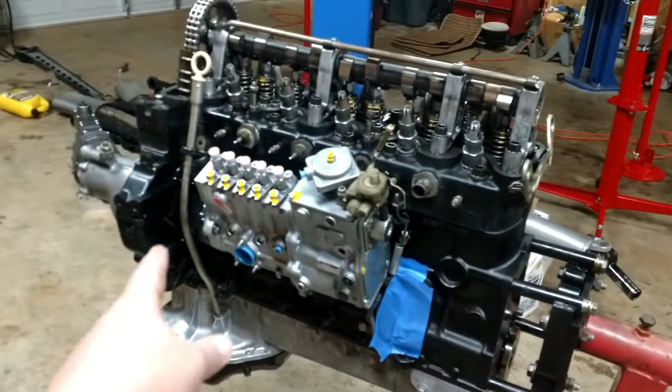Tonight I'm going to start working on putting some lines on the fuel injector and the injection pump, and putting the oil filter housing on. I need to crank the engine up on the test stand, so I'm not going to have my oil cooler - it's not going to be in a car. A guy on the forums told me these are M18 by 1.5 fittings.

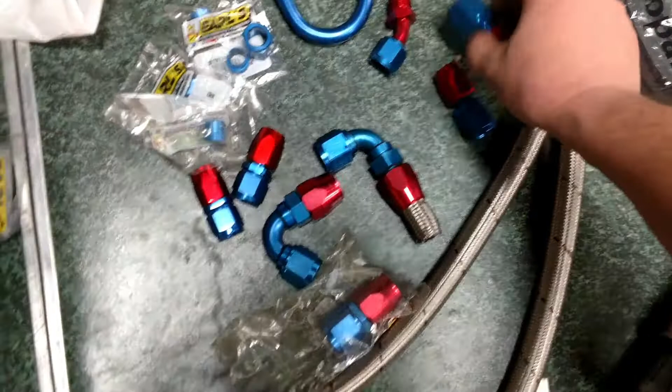So I'm going to get that M18 by 1.5 to a 10 AN fitting. From working on the race car over the years, I've accumulated lots of AN fittings, and I had some leftover 10 AN hose here. So I'm just going to throw a couple of these fittings on the end of the hose like this. That's a 10 AN line - plenty for oil flow to flow through.

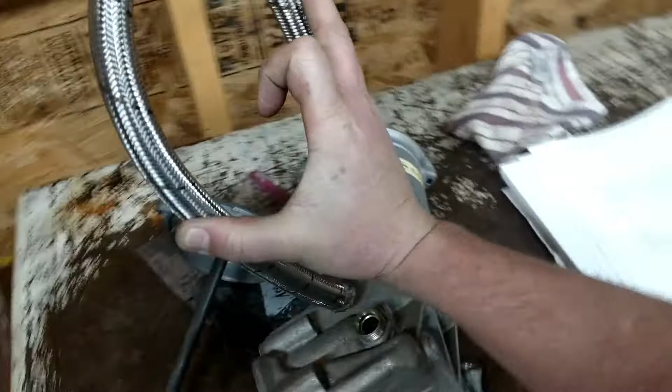I'm going to take this and bend it over like that and connect it onto the adapter, creating a closed loop. So when the oil thermostat opens, trying to send oil to the cooler, I'll just have this loop right here, and I'll remove those fittings that are in there and put this loop there. That way I don't have to have the oil cooler hooked up.

I think I'm going to run it maybe just for 30, 45 seconds, just to make sure everything works. I'm not going to bother hooking up a radiator or filling it with coolant, because the engine does not get hot that quick.

So anyway, I'm going to order some of those fittings and then put that 10 AN line on there on the oil filter housing and get it installed on the engine.

But I just wanted to show you how you make these. First thing you do, you wrap some normal electrical tape around here. You wrap it really tight.

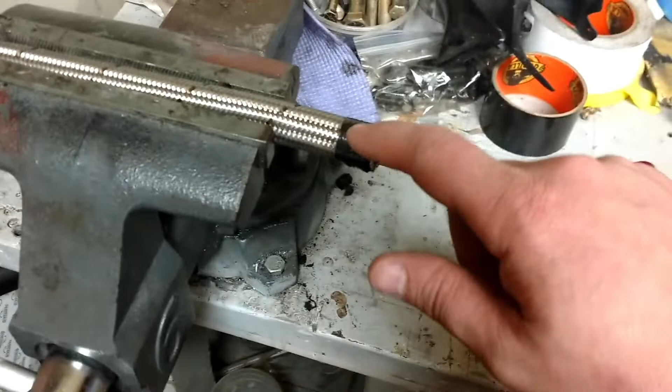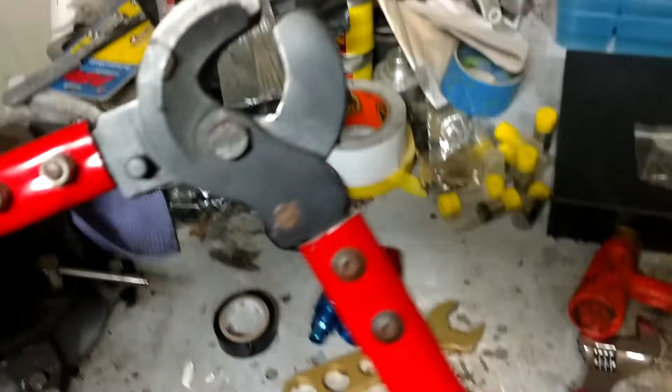You can use a Dremel tool to cut these, but I went ahead years ago and bought some AN hose cutters - looks like I nicked them right there a little bit. They're literally called AN hose cutters.

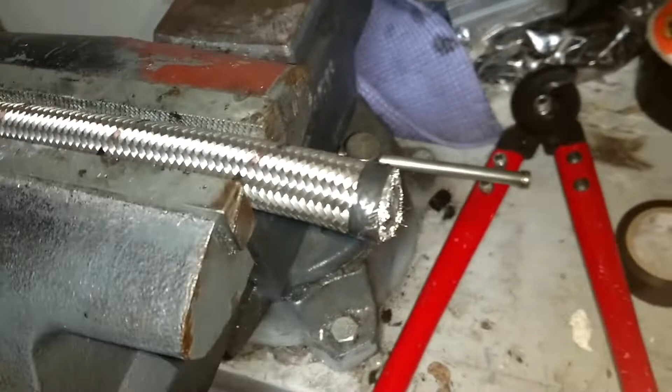Let's see if I can do this with one hand. So I just cut it off. And what that tape does, it keeps all the little frayed metal ends - for example, like that right there, you don't want those sticking out.

It keeps them all tight together, so then you can come back. See, it's also - when you cut them, it kind of mushes everything together when you cut it. And then you can go back with one of these guys.

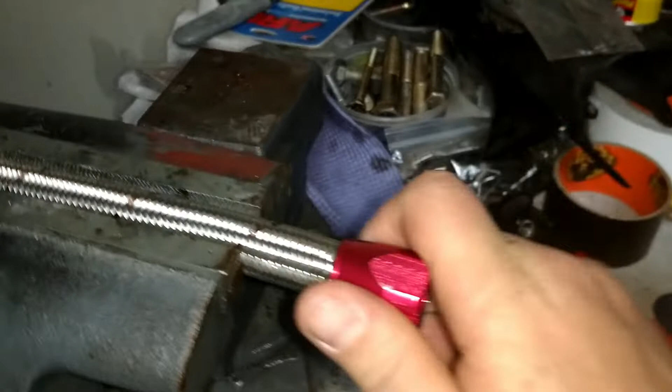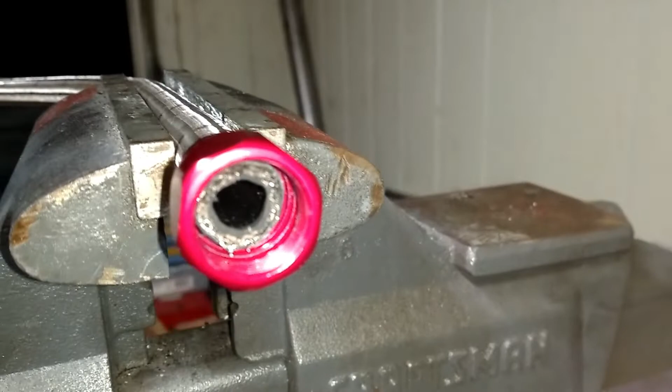You can leave the tape on there - you do not have to take that tape off, because once you put this on, we're just going to go all the way up. You just kind of twist and push. Yeah, that's pretty good, let's go a little bit more. There we go, just kind of twist and push it on there.

And then to get this in there, this is really the harder part. I put a little engine oil right here, and then you push it in there and you twist, and then you can get it screwed in there. The engine oil just helps it to slip into the hose. So I'll do that and then start recording again.

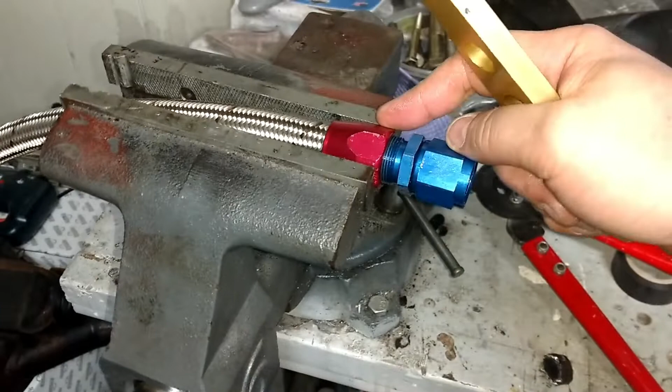I got the thread started on there, and normally you don't want to put it in a vise, or you want something to protect it because it'll scrape up these aluminum fittings. But this one is a hose that's just going to be used in the shop to test a new engine, so I don't care if it's all marred up. It's not going in a car, it doesn't need to look pretty.

There we go, come on, get out of here. And there you go - you just crank this AN fitting down there.

Until you want it to get - there'll be a little bit of a gap right there, but it'll get pretty flush. So I'm going to finish it without recording.

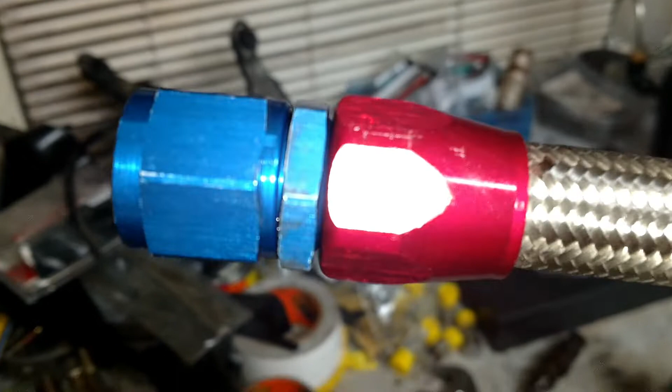It's done, this side. See, there's a pretty close gap there - it's not all the way seated up against the red, but that's far enough. Wish you could see down in there better.

But that is how you make an AN fitting. And the reason I'm doing this is I'm putting M18 male by 1.5 to 10 AN fittings on the oil filter housing, so that I can screw this in on the send and screw that in on the return and just create a closed loop.

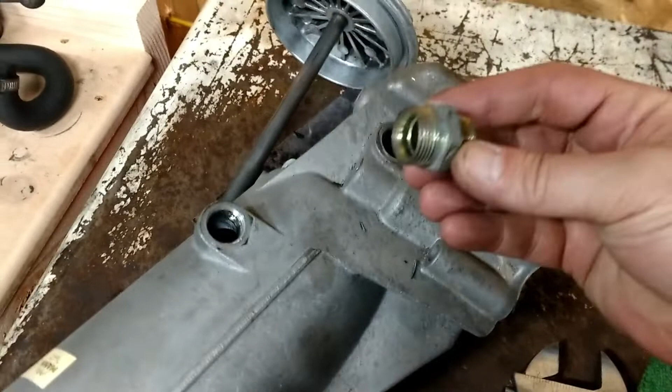Okay, so I took the fittings. These are the factory fittings, M18 by 1.5. It looks like... yeah, there we go. That's how they go in there. One end's bigger than the other.

But I just took these out of here with my air compressor, and I took those out with the air compressor too. It was a 15/16 socket that fit these fine, because I don't have the tall metric socket.

So I took these guys out, and then I'm going to put in the fittings I ordered to run this AN line. I'll just loop one end to here and one end to here, creating a closed loop to bypass any kind of oil cooler.

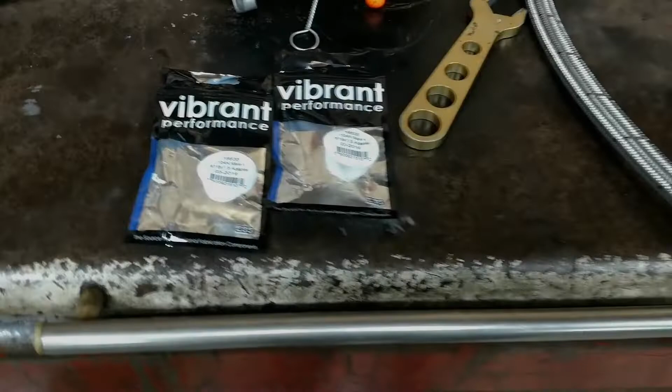The fittings came in the mail today, Vibrant Performance 16635. It turns out the stock M18 fitting section is a little shorter, while the Vibrant section sticks out a little more. So I just stacked a bunch of crush washers behind them, because the threads don't go that deep into the housing. Anyway, I got those screwed in.

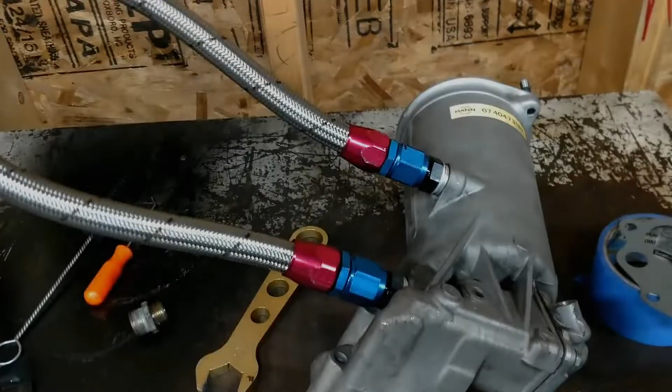Okay, I got that screwed on. That's how that's going to work. So if the bypass opens, or for any reason it's not going to shoot the oil out of the engine, it'll just loop back through there.

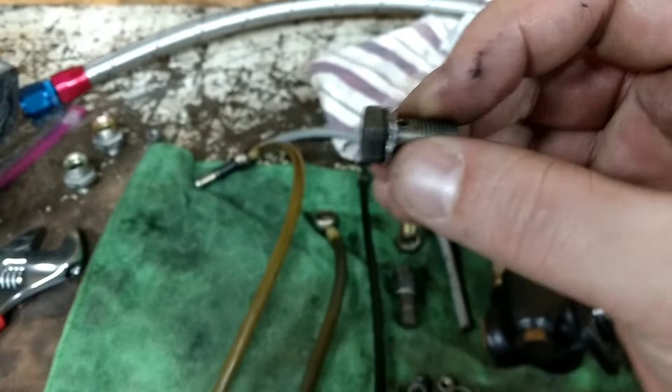These are all the lines and the lift pump for the injection pump. So I'm going to put all that stuff back on, and I've got some new crush washers. Some of these are looking kind of raggedy, so I'm going to put some more crush washers. But I'm going to start putting all that stuff back on the injection pump, and I'll show you where it all goes.

In order to get all the diesel lines and fuel lines attached, you got to attach the housing for the power steering bracket, and the filter. So you got two bolts that go here. This, I think, holds the vacuum line that comes from the vacuum pump, and goes up through here.

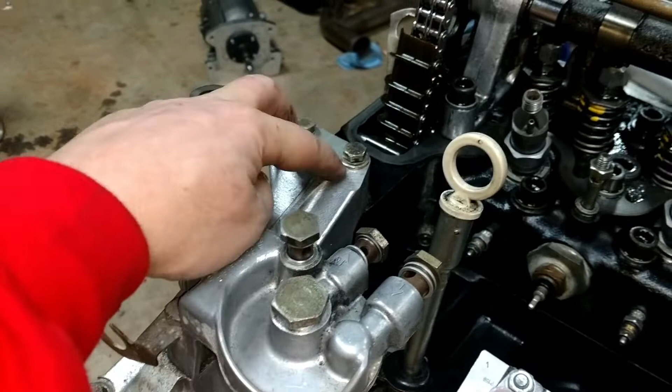Also, there's a dipstick tube holder that goes here in the side, and these two bolts also mount this to the block. So they serve two purposes: hold this bracket and mount this whole assembly to the block. Then we got another bolt right here that mounts it to the block, going through to the block right here.

This one, let's see what else we got here. Looks like we got two long ones that go through to the bottom and mount into the block. So I'm going to go ahead and get this tightened up, and then we're going to run some of the lines.

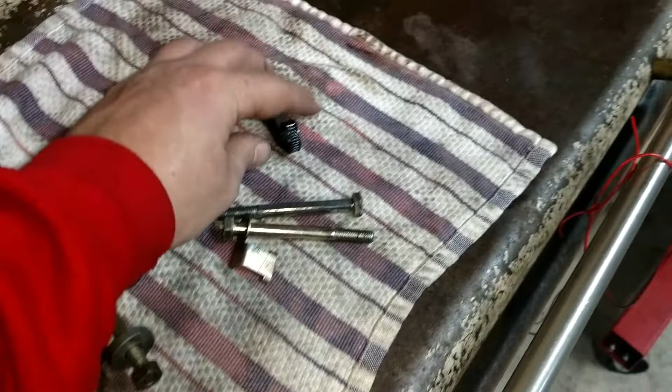Guys, something else. So this came off the original engine, that's a little reusable zip tie. And then we have this funny little bracket right here. Oh no, I'm gonna have to clean that up, it's got some dirt on it, some grease on it.

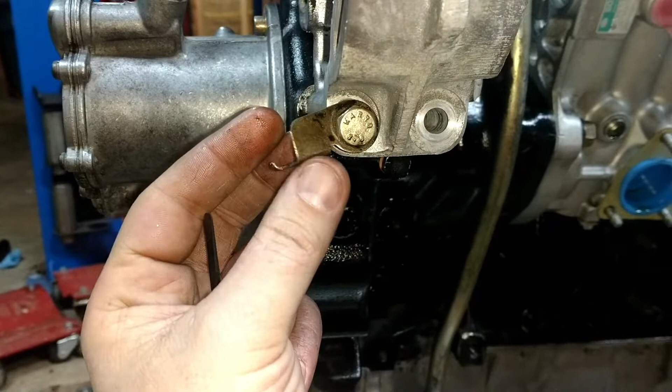So this little bracket secures the bottom of the housing that I was just talking about. But this little bracket right here, that's funny, it sits like this, and there's this little zip tie that goes around it, used to zip tie I think the RPM or crank position sensor that goes right in there.

This is what they used to mount that, and it goes on just like this right here. I'll show you that. Yeah, here it is right here.

This little sensor plugs into the crank position sensor bracket, or I don't know if it's a crank position sensor or RPM sensor, but whatever. Then this hooks onto that bracket using that zip tie. That's how they did it from the factory.

All the bolts in here: 2 here, 1 here, 2 here, and these are going into iron, not aluminum. But these are basically 13 millimeter, which is pretty close to a 9/16. And the torque spec, like on a hot rod or whatever for a 9/16, it's like 18 to 20 pounds.

It's not much, so here's about 20 pounds. Let's see, I could look it up in the service manual, but no need. There you go. That's what 20 pounds looks like. It's not much, you don't need to crank these things down, they're not big bolts.

Let's get this little bracket lined up here. Oops, sorry, let's get this little bracket lined up. There it is right there. That's how Mercedes had it from the factory. And let's just torque that to 20 pounds.

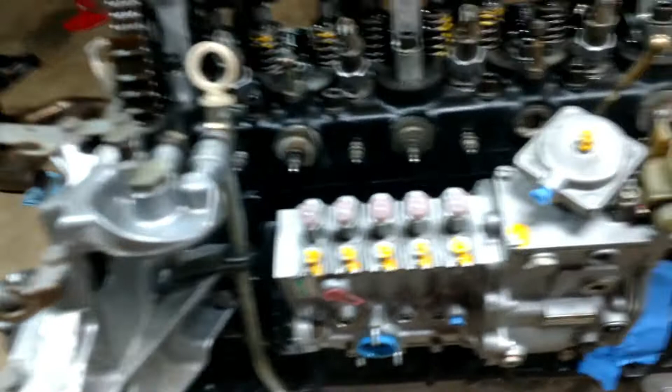There we go. I need to get a little extension to get in here and get that one. So I'll get that torque down, and then I'll start connecting lines. I'm about to put the power steering pump on.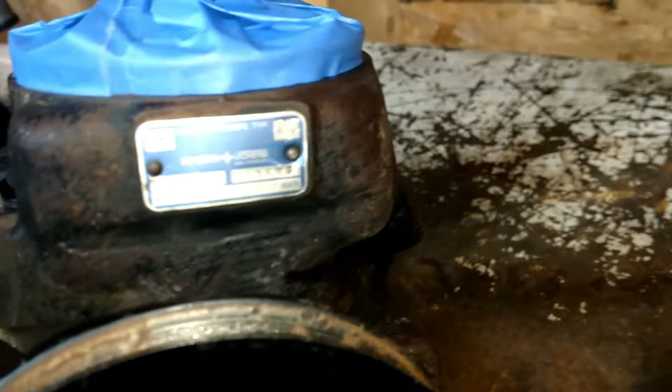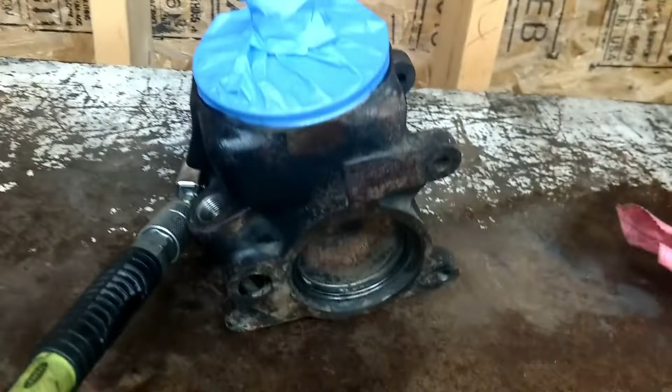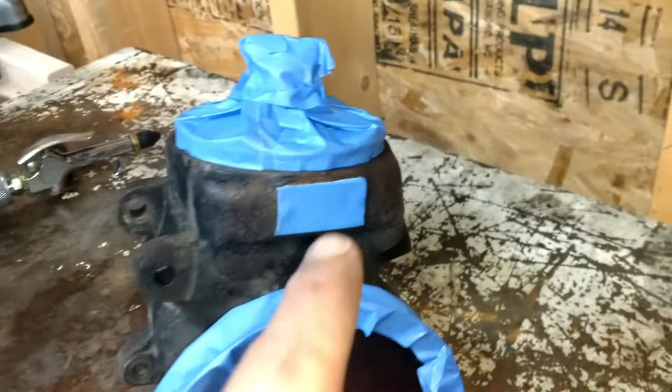I just hit it in the parts cleaner and knocked off some dirt, and you can see the paint's come off in a lot of places. So I'm going to clean this up a little bit before I throw it back on the engine. I just taped it up, don't want to get paint in the groove here. The front pulley's kind of cool because it still has the factory mark on it. I guess they put a green paint swab there when they torqued that down. It still has the part number, and the paint's still on there good, so I don't want to hit that. And then I covered up the little plaque. So let's see what this looks like after I paint it.

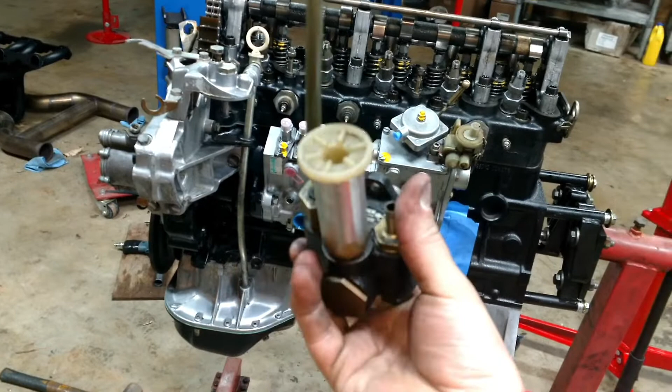Okay, now I'm going to install the lift pump. I just cleaned it up. This thing was in good condition and working fine, and I actually have this original style lift pump on both of my other cars, never had a failure. Now I realize this original style primer pump is prone to leaking, but I'm just going to go ahead and put that on there. If it leaks, it's an easy swap - you can just order another one, then it unscrews and you screw another one on. But it was not leaking on the car when I took the engine out.

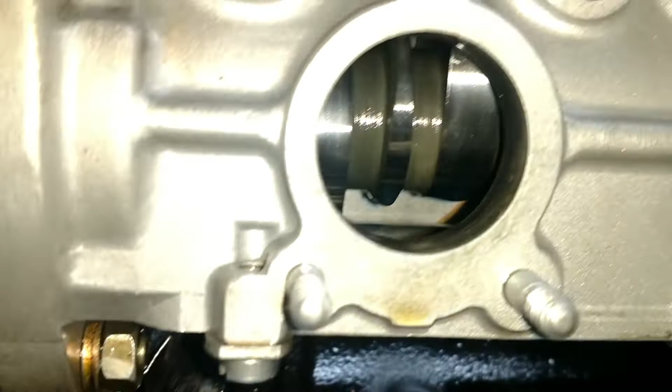And it looks like Bosch, I'm going to lay this down here. I wonder if oil is going to come out of here. Oops, sorry. It looks like Bosch included a seal right there, so I'm just going to use that one. Let's see how thick this thing is. Oh yeah, that's good, that's cool. You can see the camshaft up in there. There you go, see the cam lobe right there? That's how these injection pumps work. But so I'll just use that seal that Bosch included, that was nice of them. They also included the seal for where it goes to the engine, the gasket, not the seal.

All right, so I guess that's a cam lobe in there that runs this guy. So I bet it's not going to go on there, and it's going to have to be pushed on there. Damn it, I'm horrible about holding this camera. Anyway, there's obviously a cam lobe right there, and that lobe is an eccentric that turns and rotates that. So it probably is not going to press on there easily because of that. Yeah, just as expected, so I'm going to have to tighten it on there with the actual bolts. Yeah see, if I push hard, it pushes the pump in, but if I let off, it wants to just come off. There we go. So I'm going to go ahead and get there's 3 little bolts and washers that go on there. And here's the original line.

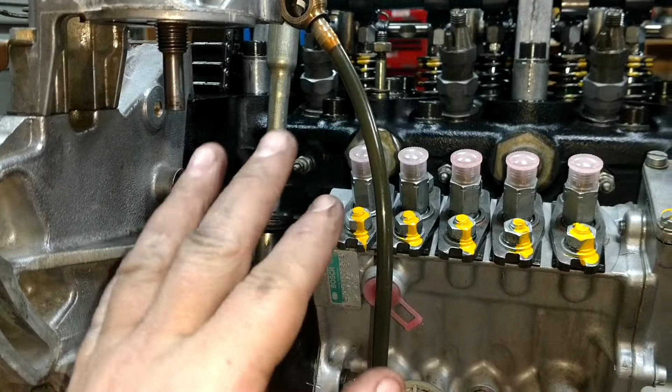This German rubber, whatever they made these hoses out of, is amazing. I mean, these hoses, I don't know if you've ever tried to cut one or remove one - these things are like bulletproof. So I'm not going to bother reordering new hoses because these are all in great shape. But again, these things are like ninja plastic, I don't know what the hell this stuff is made out of. It's the best fuel hose I've ever seen on any car, period. It lasts for - I got some spray paint on my hand - I mean, this stuff has lasted for 40 years and it's fine. Now you don't want to go creasing it, I'm sure it could be brittle, but the stuff's great.

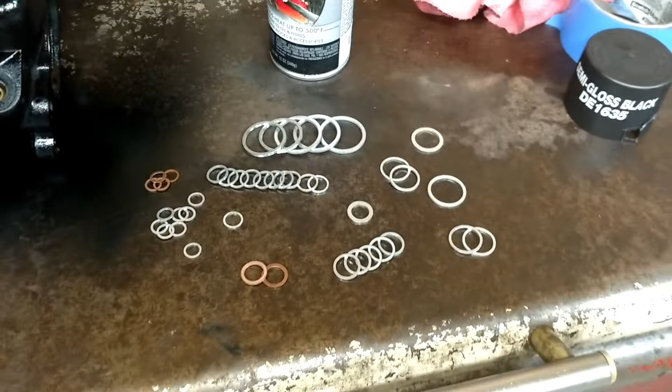So I'm not going to bother changing these fittings because when you change the fittings on a new hose, you have to heat these up and kind of melt it and then slice it to pull them off - they do not want to come off. And when you put the new ones on, if you ever have to do that, you have to heat it up and slightly melt it and then push it in real quick. It's a pain in the butt. But yeah, nothing wrong with these, I'm going to reuse them. You order the engine overhaul gasket set, I think it's the one from Elring.

The lower engine overhaul set comes with a pack of crush washers, all kinds of different sizes. These are actually the spacers for the injectors and the pre-chambers, and I didn't use all of them. I didn't need them. But tons of crush washers. I've got them sorted here by size, and a lot of that is for the fuel system.

You can see here where this first line comes out of the fuel pump and into the filter. Let's take these off and see what size these are so we can replace those. Because these are the original ones, and crush washers can be reused, but it's better to just replace them if you can.

Let's see what size that is. God, 40 years old, it looks frickin' fine. That's the crazy thing about this engine, everything looks fine on it. No, it's not that one. Here we go. Yep, it's those two. So, put my used ones aside.

And of course the crush washer, you got to put one on that side. This is a banjo fitting. Banjo fittings are great, all the factory cars used them - GM, Mercedes. Usually in brake systems, brake lines, and fuel lines, you'll see banjo fittings.

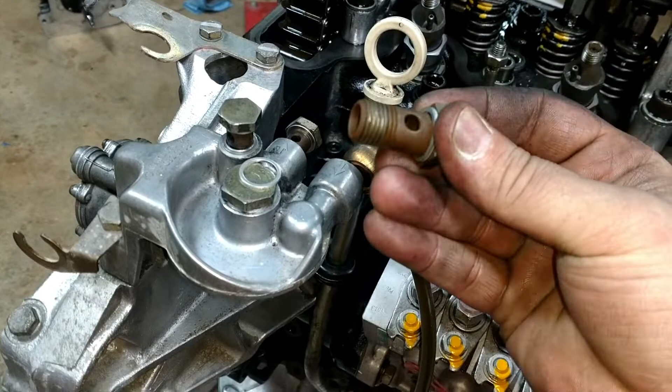The way a banjo fitting works is you have a little hole in this bolt right here, and in the banjo fitting there's a valley in there. So the fuel can come through and flow around here, and it will shoot through this hole. There's a space all the way around that allows the fuel to go in any one of these holes, and then it shoots through here. Great design, they work great, especially on high pressure brake systems or fuel systems.

So that's, whoops, sorry. I'm not going to put any anti-seize on there because it's a fuel system. I'm not going to snug that down yet, I'm going to look up the torque specs for that because that's aluminum, and you don't want to mess around with aluminum when it comes to torque specs. So I'm going to look and see what Mercedes says, and let's go ahead and find the ones for this one too.

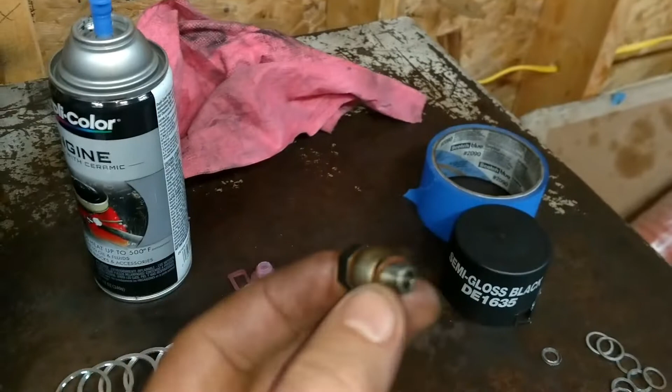I just wanted to point out there's some copper washers in this set here. See, there's a couple of copper, there's 2 there, the rest are aluminum. And the aluminum ones are for connecting any of the lines to aluminum fittings - you know, here, here, here, here. There's one in the back.

But then you see, this is kind of interesting - there's a line that goes from here up to, you can still see the copper washer stuck on there, up to the cast iron engine block. That one's got to be copper, so I got to get that old one off of there. So when it's iron, use a copper, when it's aluminum, use an aluminum. I guess that's how Mercedes did it - I guess the whole dissimilar metals and corrosion issues.

Let's see if I can pick this one off of here. There we go. So we'll go put this one on here. Now this one goes back behind there. And that's weird, I don't know what.

Oh, you know what this is? This is an oil line, that's why it's black, and these are not - these are fuel lines. So that's how the injection pump is oiled, comes through here and comes into the side. That's exactly what that is. You can see the rest are kind of diesel fuel color - well, they're golden brown, and that one's black. So that's the injection pump oiling line.

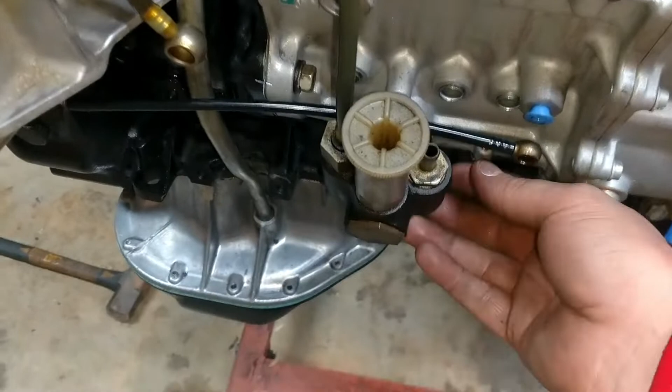So I'll connect that one there, and I'll go ahead and show you how this connects. From the lift pump, you have a barbed fitting - barbed, I mean like this, it's got like 3 ridges on it. So it comes out of here and goes into your main fuel filter housing, see the arrow, then it goes through the fuel filter, and then it comes out of the fuel filter and back down, and this attaches back to the injection pump. So that's how they send and return from the filter.

Okay, here's one of the diesel return lines from the injector. That goes on there like that, and I guess this is a return. And I guess here's another return, it goes to the back of the injection pump right here. I'm assuming it's a return. And here's the main return back to the tank. I'm just kind of guessing, I haven't read about this in the field service manual, but that makes sense.

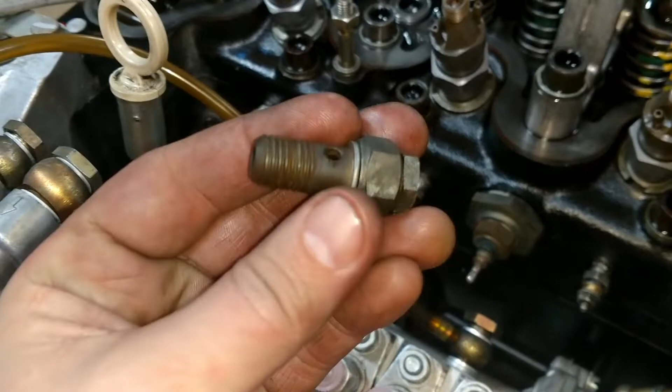So anyway, I do have this one here. I don't remember what this one came out of, but I guess I'll just find it. It's bigger than the rest of them, and it also has a check ball or some sort of spring in there. That also almost looks like a rack damper. No, there's no rack damper on here. I don't know what this one is. Doesn't go, that would be vacuum. Anyway, I will find it soon enough.

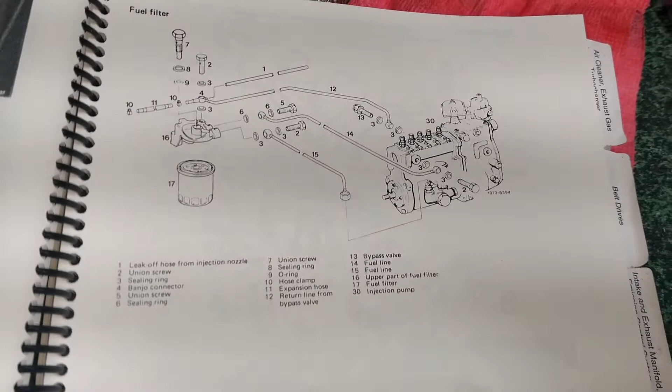Okay, I see where I messed up earlier. Here's a picture of the injection pump, and you can see that number 13 here is a bypass valve. So the fact that they call it a valve means that's what this thing is. See that little valve in there? Let me get into focus. You can see in that hole, there's a little valve, and there's a ball down there. So that's what this is. So I'm actually not missing it.

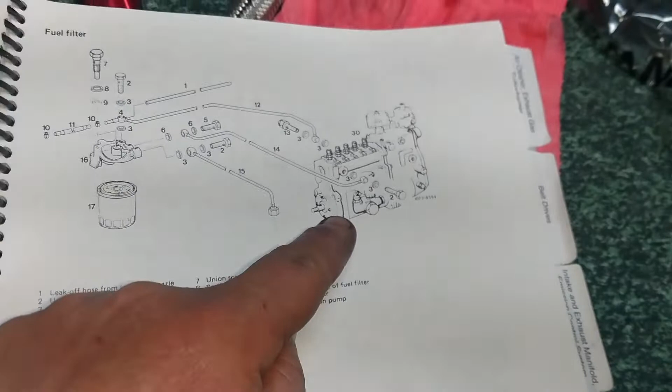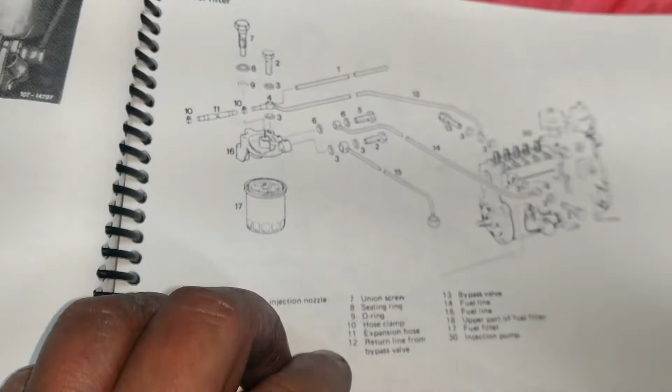What's wrong with the camera today? Number 3 right here is, oh, sealing ring, let's see. There we go, number 2, union screw. So what they call all the bolts, the normal banjo bolts, like a 2. See, 2. Interesting, that one's a 5 union screw, so it's just a different size. So all the normal banjo fittings are 2s in the diagram, but this number 13 is the weird one.

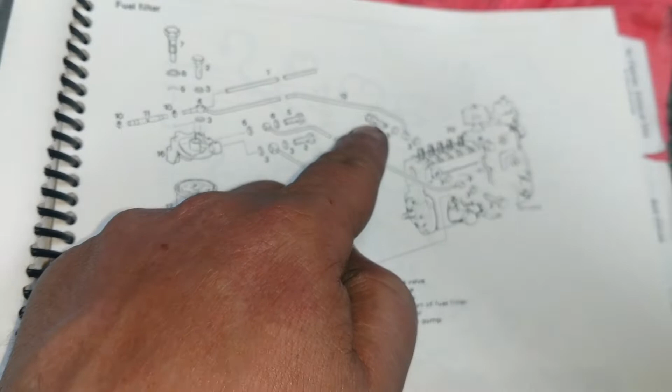You can see it even has that weird shape, has a nut on it, like a socket head on it. That's what controls the bypass valve. So I guess when there's too much fuel, it comes through here and goes into the bypass. So I wasn't missing the guy here, I actually have it, but I had it in the wrong place. Back here is where the bypass valve goes, and it runs from right here, from this union fitting, what they call it. We call them banjo bolts here in the US. Change the crush washer there and put in the bypass valve.

So this might be totally random, but for example, here's the little plugs like I pulled out of the injection pump when Bosch gave it back to me. Anytime I get a plug from a manufacturer, like on a brake line or a carburetor or a fuel pump, any kind of, I just save it. I put it in here because I think that's from a radiator. These come in so handy for just random stuff. Just save all your little plugs that manufacturers send you because they're great. Anytime you have to take apart something or work on something, power steering pump, radiator, brake lines, fuel pumps, just grab one of your little plugs from the manufacturers and plug it up.

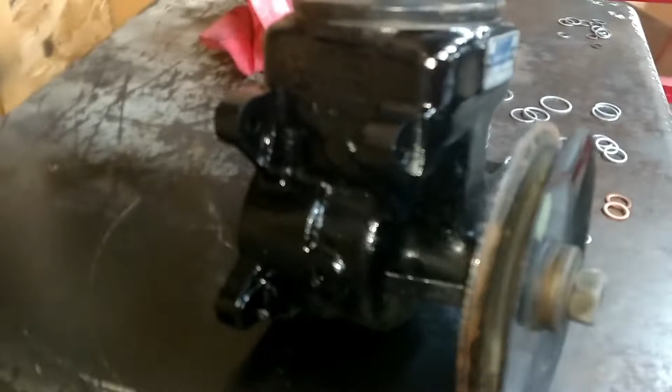Let's go check out the power steering pump. Okay, I cleaned up the original power steering pump and just put on 3 coats, and it came out nice. Like I said, I didn't paint the pulley, I wanted to keep that factory marking on there. Yeah, cleaned up really nice. Yeah, it looks really good.

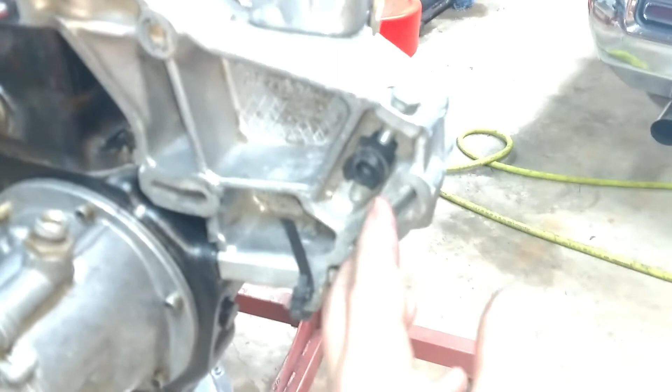So now I'm going to put that back on the engine, because the power steering pump goes right here. And this is interesting, this is like an adjustment bracket. Yeah, this little plastic adjustment bracket, you don't want to break that because it's plastic. Also, there's the original clip that I put back on that bracket. So regarding that little plastic adjustment doohickey, this little thing...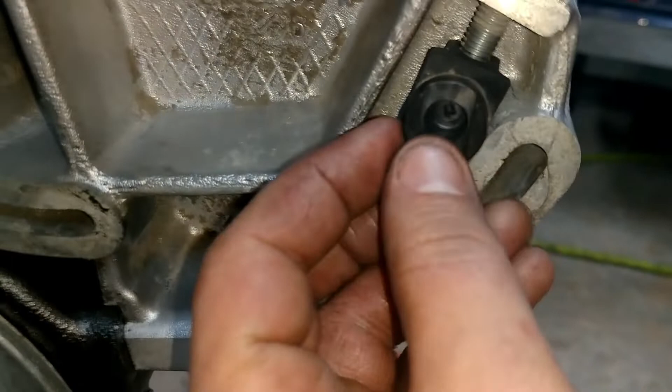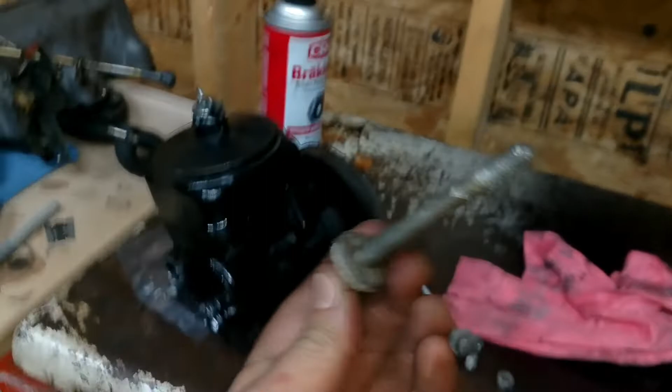I wanted to show you how that works. On the back of the power steering pump, there's this little steel rod that's pressed in through here, and that little bracket fits around there. So when you install it, you want to push that bracket in there with a tab on each side. See, this has a tab here and a tab here, and that little rod goes in between them right there. And then also on the power steering bracket, they have these very thick washers, Mercedes uses these very thick washers. So when you're bolting it up, it goes through, and that very thick washer mounts to the front of that pump.

Actually, I'm sorry, it's not the front, it probably mounts on the back. I'm looking at this, so that goes through there, and I can see the wear mark. Yeah, that's how those go. These thick washers go on the back. You can see there's one there, and you can see where the washer used to be, there's an outline of it. And then there's one up here. So that's how that mounts.

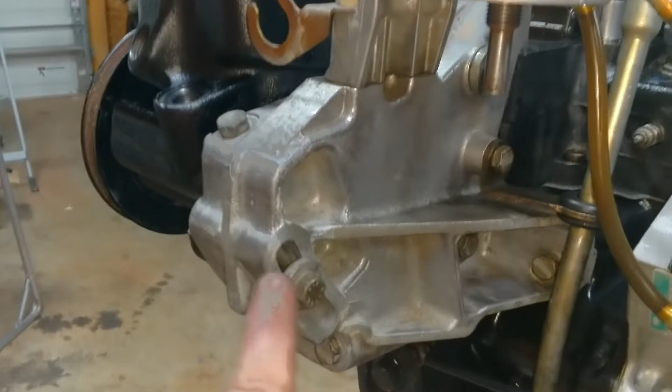So I'm going to go ahead and get that mounted up. I got the power steering pump on, and the way it goes on, all the bolts go in through the back, using that real thick washer here, here, and here. They go through the back and screw on in the front. Not sure what this arm right here is for, I guess we'll see later. I thought a long bolt would go through, but I looked at one of my cars that hasn't been taken apart, and that's how it is.

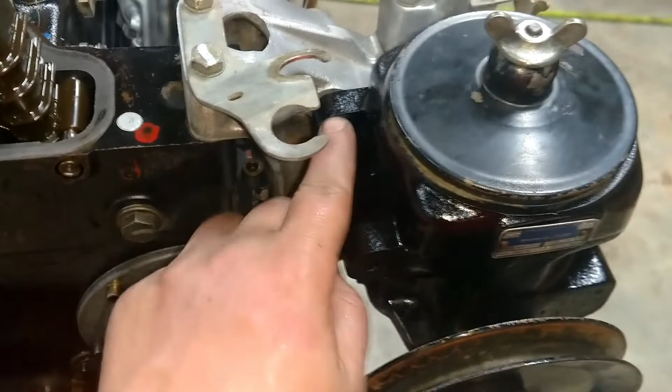So let me get all these fittings torqued down. I couldn't find any torque settings for the banjo bolts, so I'm just going to get them snug. When I fire it up, if it leaks, I'll snug them up a little bit more. Because that's into aluminum, I'm going to go like 10 foot-pounds or so, because you don't want to strip aluminum.

It looks like these smaller ones are 17 millimeter. The one that's a little bit bigger, I didn't have the metric wrench, but it's 3/4 SAE. This one back here is a 17 millimeter. I'm not sure what these small ones are, let me get a wrench and see. And these down here are 12.

Now guys, I can't stress enough, do not over torque any of these. This is aluminum and it will strip very easily. I'm just snugging everything up, and if it leaks, I'll torque it a little more. But I'm only putting like 10 foot-pounds on these. You don't want to over torque them, you'll strip it very easily.

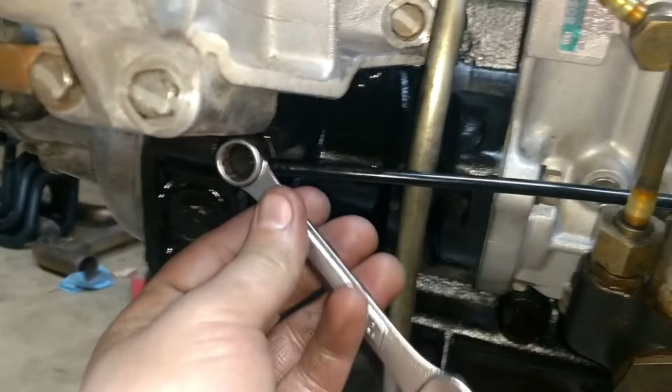So let's torque these guys up. This is the oil feed. They naturally want to go a certain direction, so you don't want to stress the lines. Just let the lines go where they want.

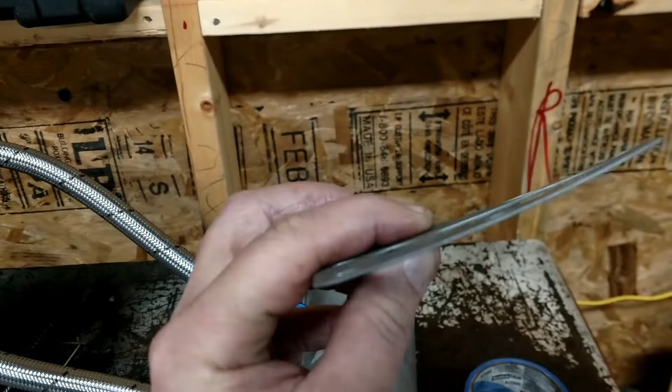Now I'm going to put the gasket on, and see how this gasket has a little bit of a waffle looking pattern. I don't know if it's true, but a buddy of mine told me that's the type of gasket you want, they're much sturdier and last longer. I think Mercedes Source has these made. Anyway, that's what that looks like. So I'm going to remove the tape, put the gasket on the engine, and get this mounted up.

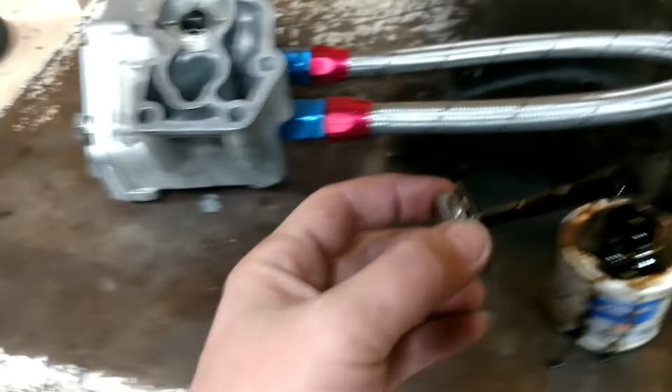All right, I've got my Type 3 sealant, it's like an aircraft sealant. I'm just going to paint some of this on here to hold the gasket in place, and I'm going to stick the gasket to the pump and then put the pump on the engine. This stuff is really good, I like to use it. So let's just paint some of this on here, let's get a little bit more there. Don't want to go crazy, just paint some on here.

Okay, and then I can take my gasket, set it on there. See, it holds the gasket in place. Then I can lift the pump up, and put it on the engine. Not the pump, I'm sorry, the housing. So that'll just hold it in place, and I'm going to go bolt it onto the engine now.

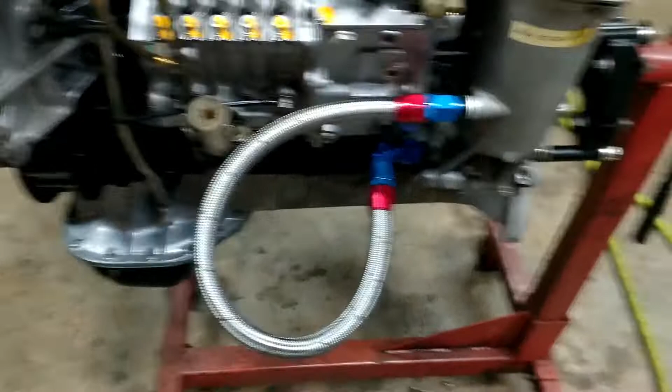So I have the gasket and oil filter housing up there. And when I was making this 10AN line, I totally forgot about the injection pump and lift pump being in the way. So I had the lines running straight out here and straight back in, and it didn't fit. So I just had this little elbow, this little 90 degree elbow here, so that way I could run it out and take it away from the injection pump. So that's going to allow the cooler to be bypassed. So this side of the engine's done.

Everything's hooked up here. And in the next video, I need to do the turbo and exhaust manifold and all the junk on this side of the engine. Still have a few pieces to go over here. Let's see, I need to torque down the front crank bolt to 200 foot-pounds. There's the turbo, I need to clean that up a little bit. There's the exhaust manifold, water pump, thermostat housing, alternator bracket. I think that's the AC bracket. No, that might be the alternator, and that might be the AC. Yeah, that's the AC, the condenser. So not too much left, then I'll put the pulleys on there.

I'm going to clean this up. And I got a couple of belts over here to throw on the engine, and I should be able to fire this thing up.